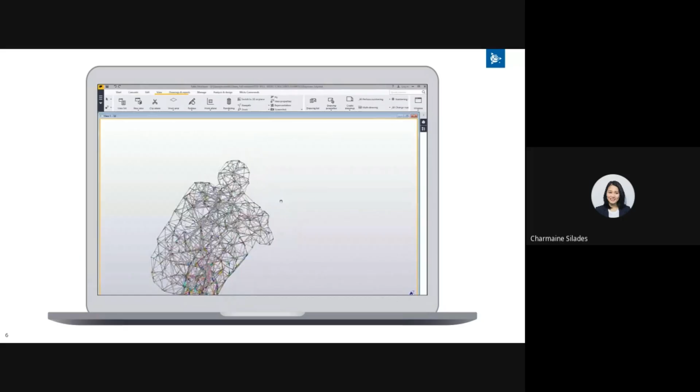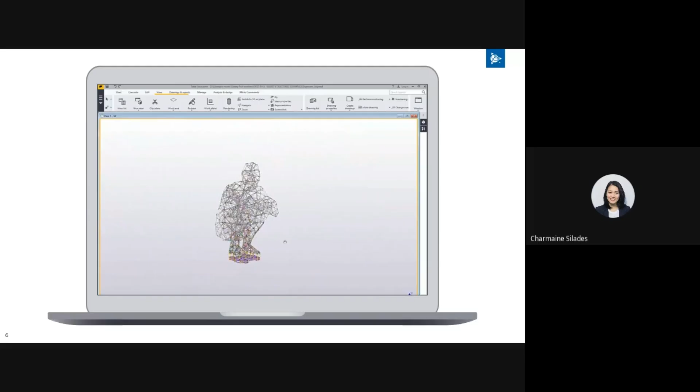One of the popular projects completed in Tekla brought the artistic concept to life. It was a very creative project that demanded a powerful and comprehensive 3D BIM solution like Tekla, because you need robust detailing capabilities, collaborative tools, and a workflow that could support the downstream fabrication process as well.

Not just those kinds of projects are supported in Tekla, but actually some of the most iconic, challenging projects are being completed or modeled with Tekla Structures today, due to its innovative and powerful way of handling complexity and level of detail.

So you see on my screen, we can support curved structures. We have the beams, columns, bracings, even modular structural projects like light gauge framing or trusses, or even pre-engineered buildings using tapered members. Even miscellaneous projects, we can support those. We can model stairs and rails, gratings, and even towers for tower diagonals.

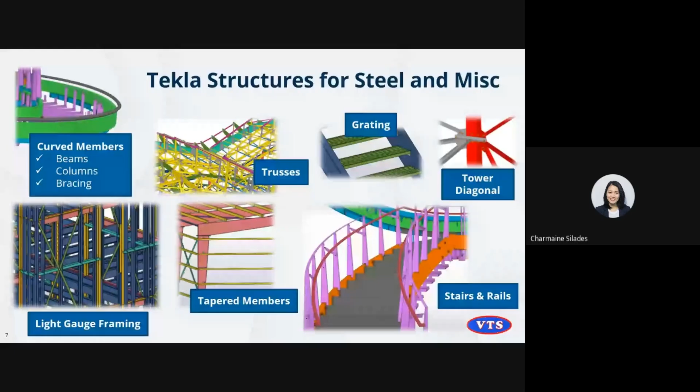The reason why Tekla stands out among solutions in the market is that it has a 3D modeling software with unique features to efficiently model all the information you need, such as the nuts, bolts, welds, even reinforcement needed for the construction site or fabrication. It's way different from the traditional or conventional method, because it's purposely built on the downstream of your project. It's not an add-on or an extension, but built-in components are there.

We can do automated numbering, automation of drawings, all the information, the connections, embeds, anchor bolts, and even work with other trades or disciplines to have smooth workflow coordination and communication with them. You could also do clash checking, so whenever you think there might be an issue with other disciplines, it could be addressed ahead of time before this comes out in the fabrication or construction site.

We support the entire workflow of your project. So the bottom line is that one detailed, constructible model reduces errors, eliminates duplication, and could save time, resources, and money for your project.

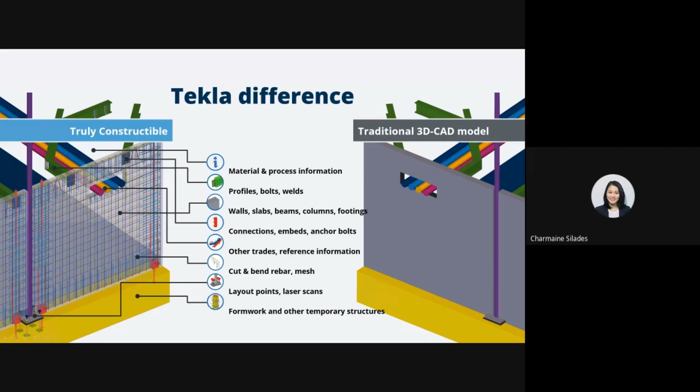So let me show you Tekla in action, how it works and how it would be advantageous for your structural steel project. This is the interface of Tekla Structures. Traditionally, we often work with a project using 2D drawings and documents, but with Tekla Structures, we begin in a fully constructible 3D environment.

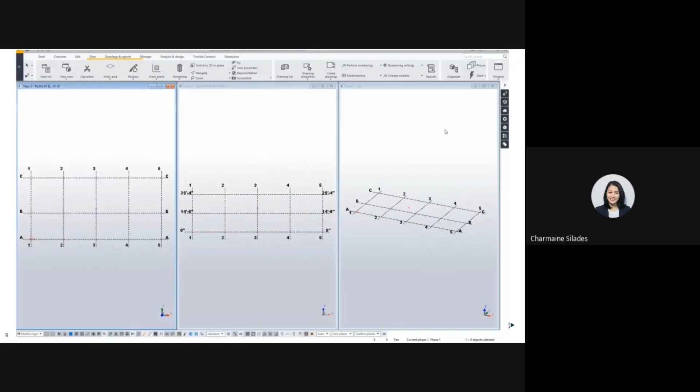Just like other solutions, we start by setting up our grid lines, and then freely you can easily move around your grid lines regardless if you're working with a typical structure or irregular one — it even supports radial grid lines for your complex or detailed structure.

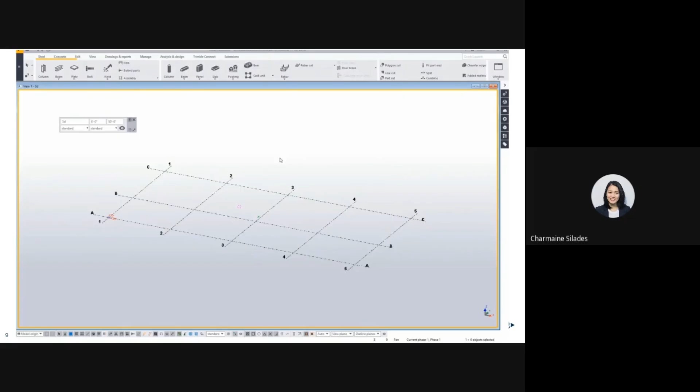It's easy to navigate with this kind of solution, as you can never get lost finding commands. You can just type in the command you need and it will give you a list of all those commands, or even highlight them in the interface, so you can easily access the command or tool that you need.

Right now I'm dealing with steel projects and my role for this is steel, so the commands or tools that I need are actually prominent for steel projects.

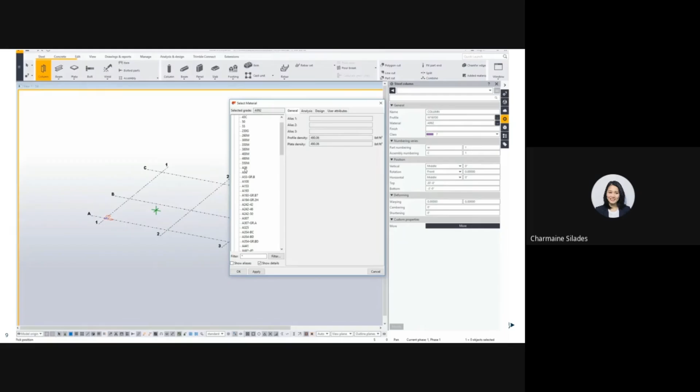Since Tekla Structures is a multi-material solution and also has a database wherein we refer to the standard for steel, we have the steel book reference for the profile library and also the material list. So, not just for structural, but also for your miscellaneous projects, regardless if it's typical or detailed and complex, and if you're doing light gauge projects, modular projects — they are even customizable, so you can add to your profile in case it's not in the environment that you have selected.

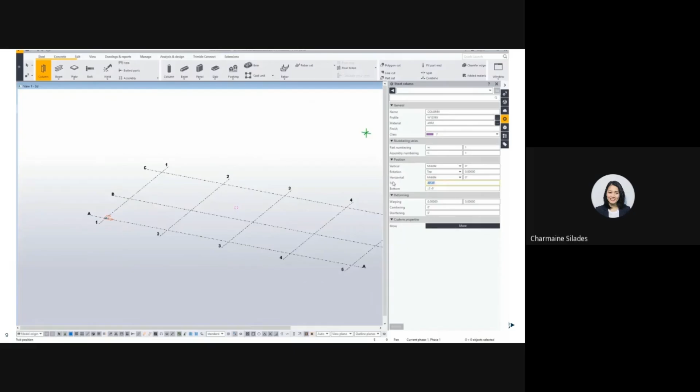So our solution is very flexible. We could customize it to whatever you need for your construction project.

By picking a command and then picking points to create your structural member, we can create the stick model of your project. And what do I mean when I say that we have the database? By inquiring on this member, you can see all the information relevant to it, such as the length, the weight, the volume, the material — all the information is there.

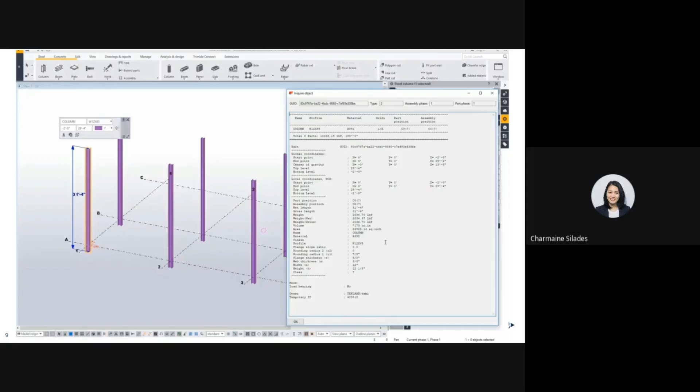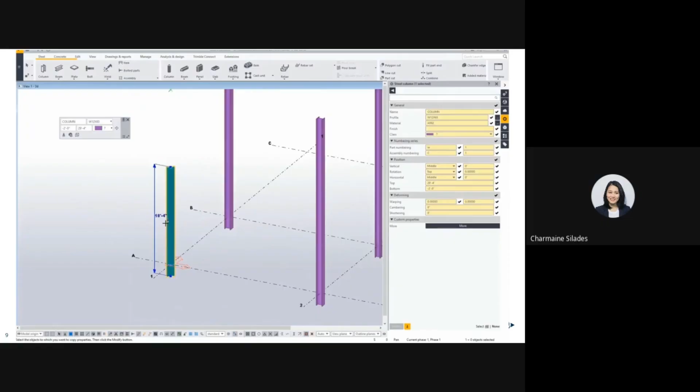And this is where our information comes from once we generate the reports and all the drawings. So we don't have manual work that is time consuming and could be tedious on your end, and our solution is very flexible if you wanted to do testing on your project and needed to revert from the original design.

Since currently I'm using the highest configuration, or a type of license that is multi-material, I can also model for concrete. So even if I'm focused on doing the steel scheme, I could still do a concrete model to serve as its reference or to complete the project itself.

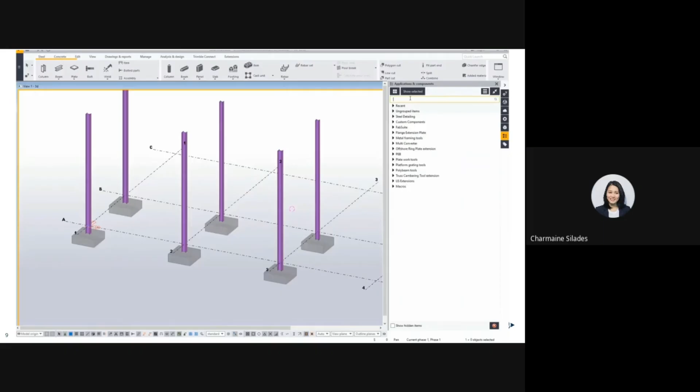And then I have here the applications and components, which give us a wide range of connections and details that you can use for your project. They are very intelligent in that you can pull directly from this database of applications and components and then apply them to the structural model that you have here.

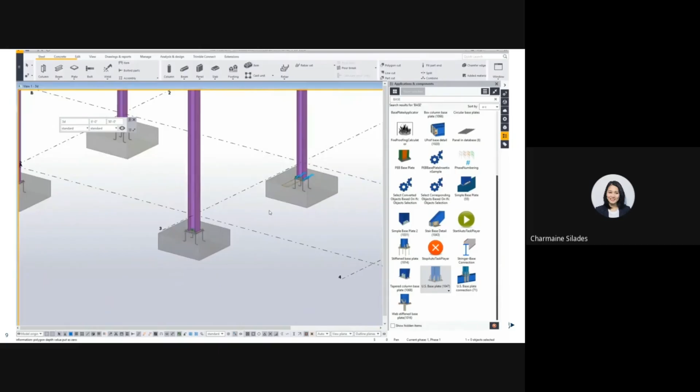As I mentioned earlier, they are intelligent. So if changes happen in your design — the size of your member gets bigger or smaller — they can adapt to changes, as they are parametric. They would satisfy the size of the member based on the changes in the project.

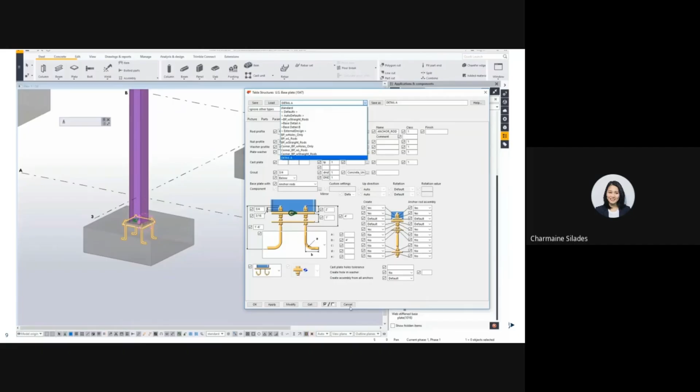So you just have to set some parameters, and since we're really minimizing rework on your project, we could save these settings so they could be accessed by your team members, since Tekla Structures is purposely built also for collaboration.

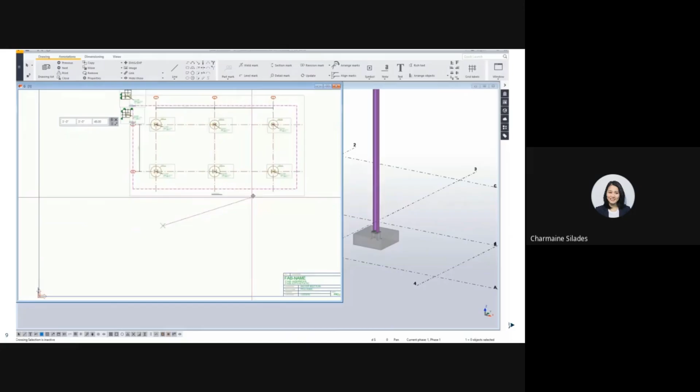You can share this model regardless of kung nasaan po sila o kung ano man po yung time zone nila. So you can work together as if you're working in one location but not having to conflict. And then once you have completed, let's say, a part, and you need to output to generate drawings or reports, we can generate general arrangement drawings here, just like you see on my screen. I have generated the floor plan for the anchor bolts.

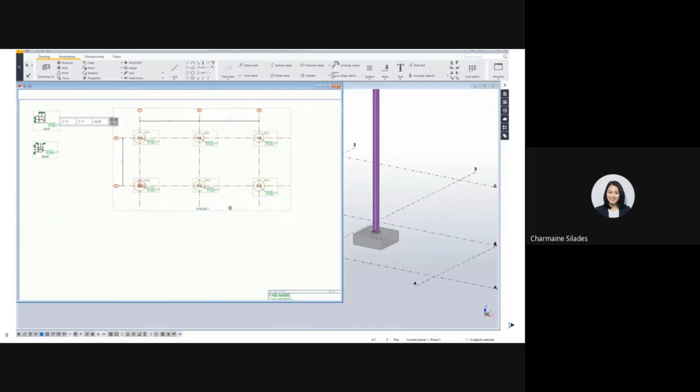And then you could easily change your view if you're keen to doing your 2D drawings into a black and white workspace or a colored one. It's easy to do modification. And then we're not just dealing here with some lines and text on your project, but actually they are all associative or linked to the model. So whenever you have changes in the model, this will reflect on your drawings. So all the dimensions are automated.

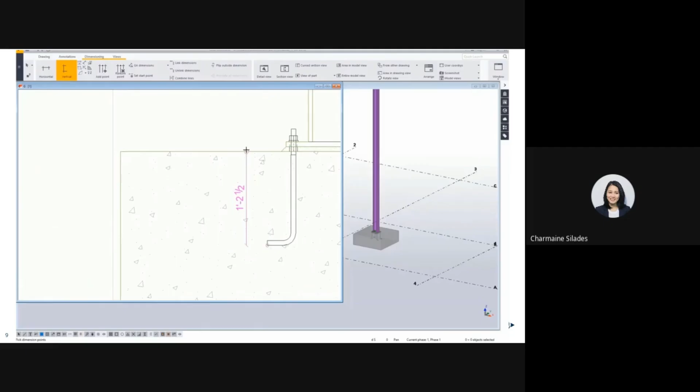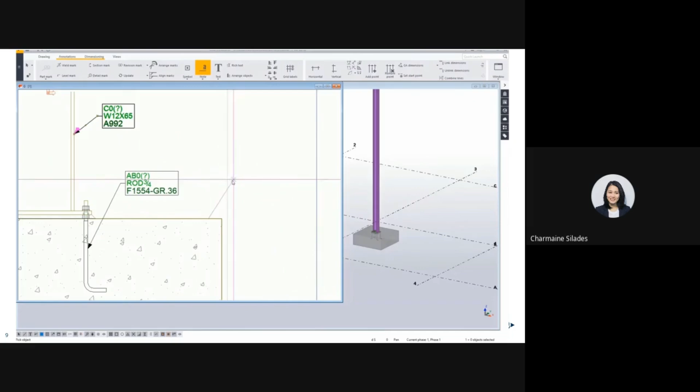And then I have here a sample wherein instead of using text to put some markings or information, to add information here like the profile, the material, I would rather suggest you use an associative note wherein you have the content, all the elements that you need, and then by the time that you have changes on the model, this information will adapt to changes or will update. So let me show you this.

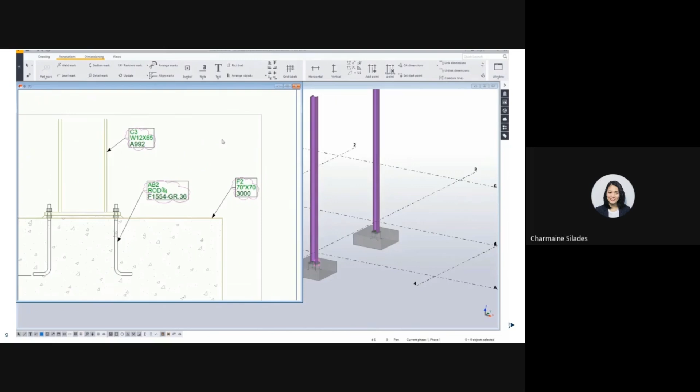So let's go back to the model, and then we have this automated numbering wherein Tekla will automatically assign numbers to all your structural members, especially if it's a huge one. Doing manual or assigning numbers would be difficult. So this is a very good and efficient tool to track all changes na nangyayari po dun sa project natin. Like this one, I have here an automated cloud.

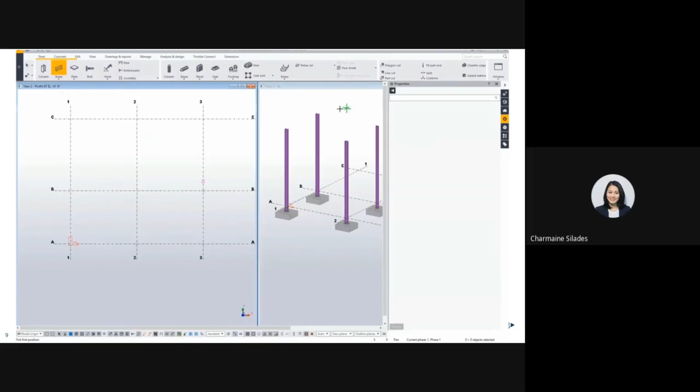So it will indicate kung ano po yung nagbago sa project natin, regardless if it's a dimension or you make some changes on the size of the section of the member. It will update on your drawings. You can easily track down all the revisions. So no more guessing what are the members that have been changed or the drawings that you need to update. So it's easy to control the project and be able to manage them, especially if you have generated huge information.

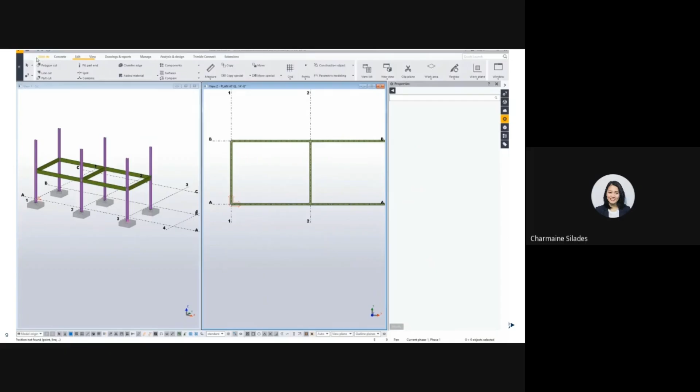And then let me complete this small project that I have here. So we'll create a beam, and then although this one is a modern way of working with your project, it's 3D, if you're used to using points to create some linear guide to do the modeling of your project, they are still here in the snapping tools, selection tools. You could make use of them.

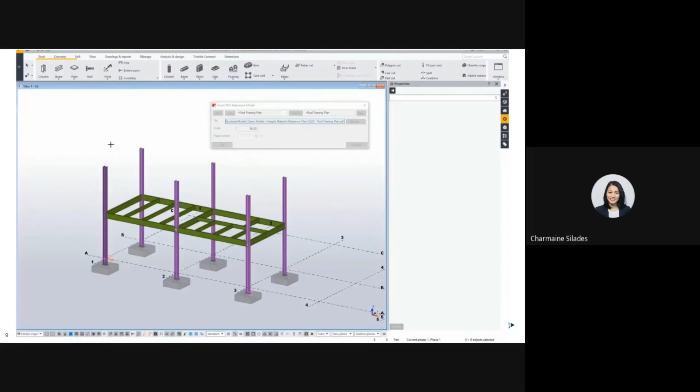And then we have completed the small part of the project, and now I'd like to show you how you can reuse a reference model. Let's say you have been given designs or drawings from your designer, you could directly import them to your Tekla Structures. It could serve as your guide, as your reference to continue modeling the structure. They are snappable, so you could move them around and then you could adjust the scale so it will be fitted on the model that you're working on right now.

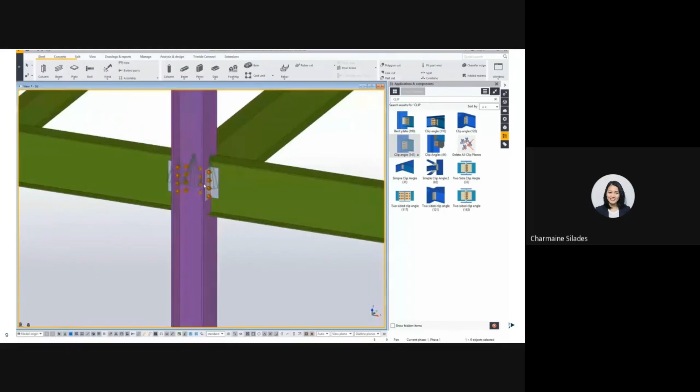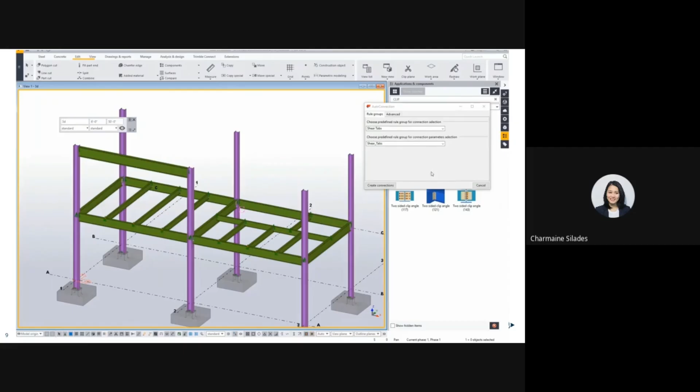And then this is a very good tool when you're working with a detailed structure for, let's say, a structural steel project wherein you need to put some connections and details. We have these applications and components, actually manually pwede nyo po siyang i-create, but instead of using applications and components, we have this auto connection that by selecting, let's say, an entire floor or part of the structure, it will automatically apply connections that are applicable based on the rules that you have provided, let's say for the shear, and then easily you could generate the reports that you need.

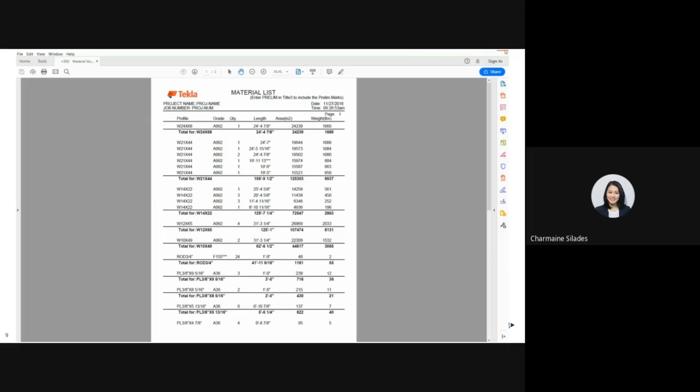This is a very good tool for the estimators doing a report, let's say, if you're coming up to be competitive in your bidding stage or just ordering some materials or just generating a bill of quantities, BOQ. So all sorts of reports are customizable and they have been organized in a way that you could easily access them, whether it's based on the materials or progress, or if you want to categorize your project based on section, framing, building, or the material, the components.

So it's easy to generate an organized report and then export them to your preferred platform, like say Excel. So you can easily export those files. Ayan po. So all the information, materials, length, the total weight of the structure will be directly delivered to you.

So purposely, Tekla Structures is built to streamline the process. Actually, there are a lot of features that I cannot show you due to time constraints right now. But we can do a follow-up session to showcase all the features that you want to see in our solution. We can explore that, even the advanced tools, and continue the discussion. Okay, so Tekla Structures is purposely built to have a fast and robust team for your project and an efficient project.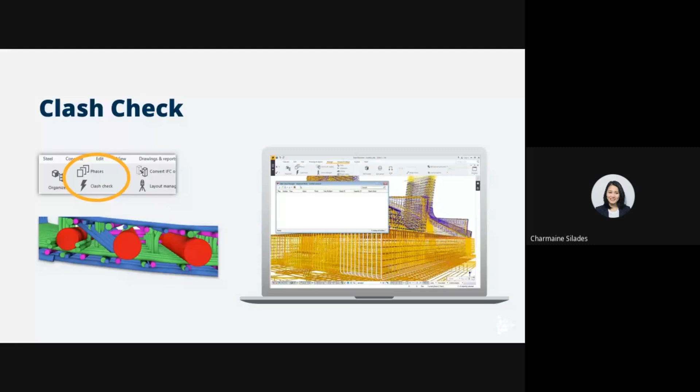And some of the features also include identifying conflicts or clashing within your project to ensure that there is no fixing needed on site. You don't need to do modifications right on the construction site, but we can address them ahead of time and minimize all those reworks from clashing challenges. And also

you can generate automated shop drawings with automated numberings that are intelligent. So whenever there are changes dun sa model po natin, mag-a-update dito sa mga publication drawings natin because they are linked to the model. So, purposely built siya para ma-track po natin whenever there are some revisions to your project.

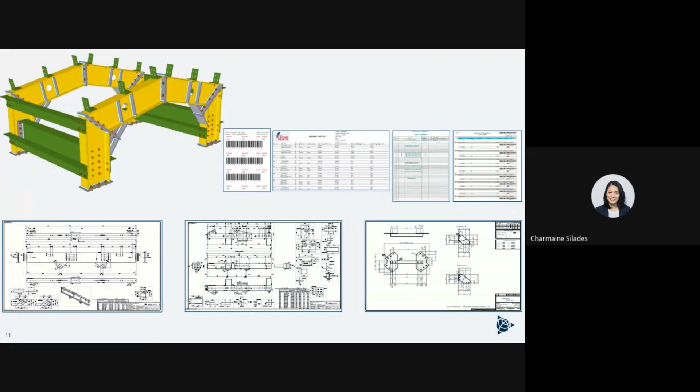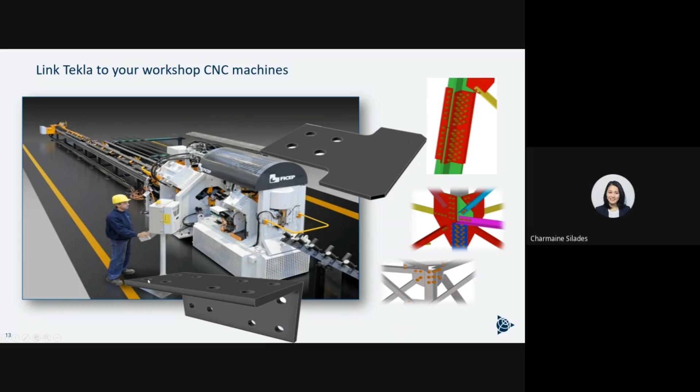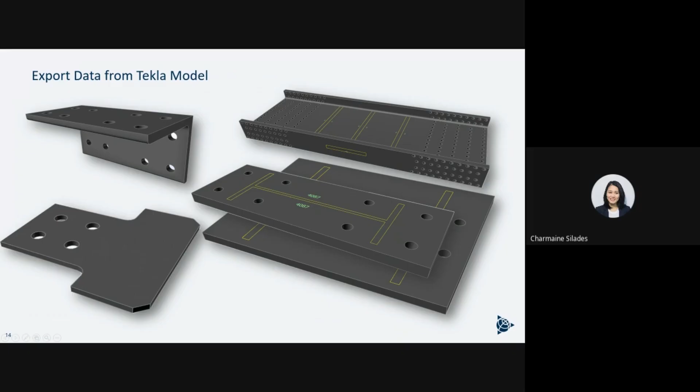And then, it is also linked to your fabrication machineries. So, regardless if you're working for a steel fabricator, we can output a file that can be fed to your machineries so that you can have smooth fabrication management. And then export data from the Tekla model to your fabrication machineries to complete the process. So it can be sawn to length, drilled, marked; all the information that you need for the fabricators is embedded in your NC files. So, yan. So these are samples of the output you can get from Tekla Structures.

So what are the benefits of having a truly constructible 3D model for structural engineers and detailers? First is that you can deliver accurate information from the design to the site to ensure everyone is aligned from the start. So this will give you improved communication also, to bring the team together as if they're working as one. So we have only one single source of information, and then we reduce RFIs. It could save time, resources, and even the expensive cost of reworks.

And then we could have a safer job site with greater efficiency and the power to drive, of course, higher profits and win more bids as you can be more competitive in your project.

And for those fabricators who aim to be efficient and to have smooth fabrication management, control, and workflow, we empower fabricators with access to a parametric digital 3D model that streamlines their workflow. And also, this model generates drawings with clear visualization, or rather, instead of referring to those drawings, we can just interface seamlessly with technologies like your CNC machines, MIS, PLM, ERP, and even nesting solutions to ensure smooth data flow across different platforms. So by eliminating those errors, we significantly reduce the rework, save more time, and boost your fabrication efficiency.

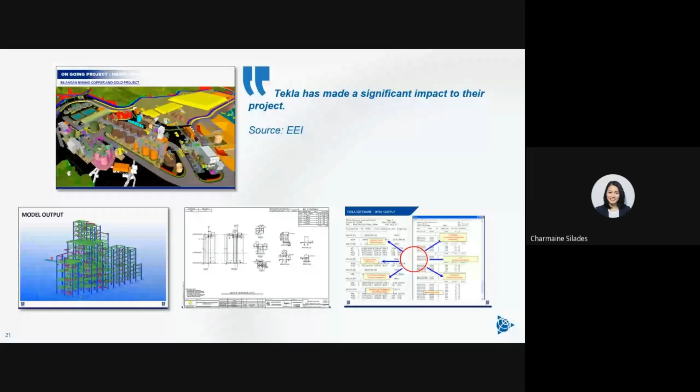And one of the biggest players in the market, which is EEI, has seen a significant impact on their projects. So these are samples of their projects and output. So kung may nakikita po kayo mga steel projects na ginagawa po ni EEI, probably they've been completed using our solution. And at this point in time, I'd like to show you that, really moving to the digital age, technology is really reshaping the construction of our projects.

So it empowers your engineers to become true heroes. So we can help you transform your engineers to become your workforce with Tekla, so that we can ease the labor shortages in our projects, as we can give them new skills to become prepared for your project with the right support. Your engineers can really be helpful to you and effective. So you can just focus on the design of your project, and we can work closely with them to support your projects.